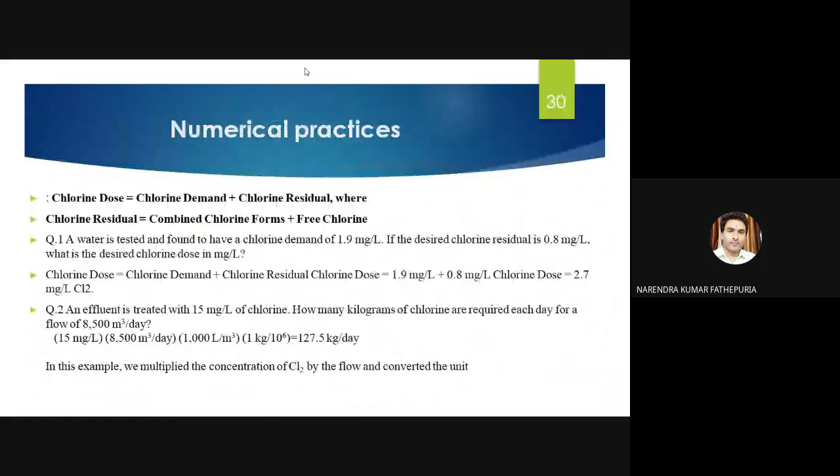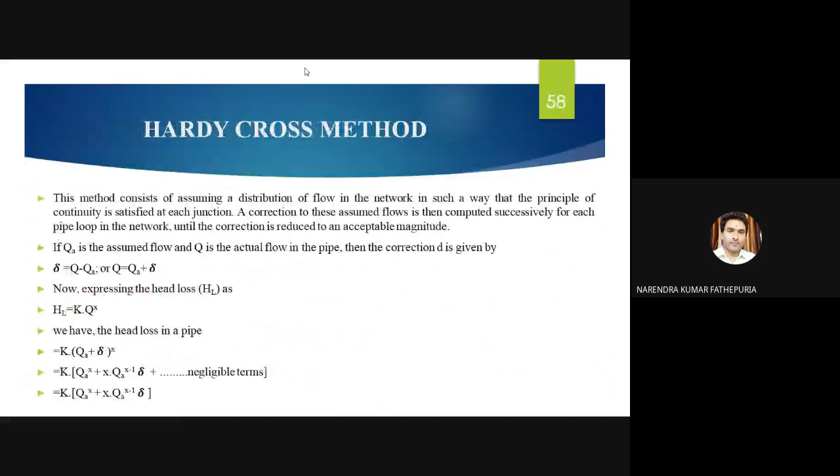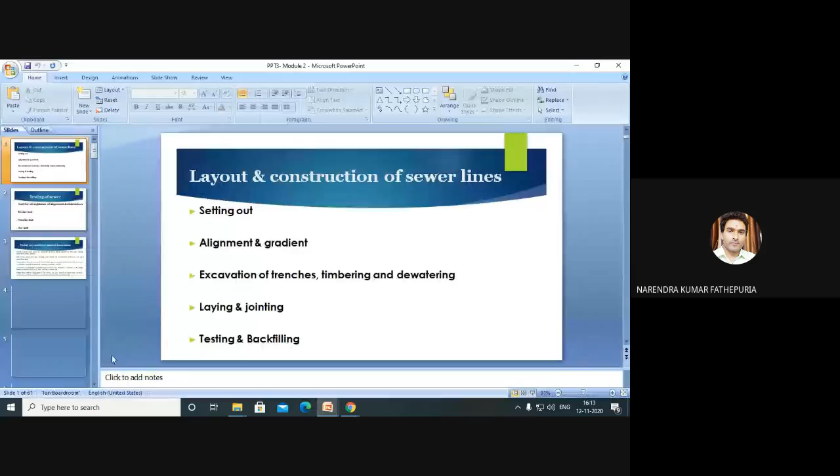The main part we want to discuss today is all about the factors involved. We'll talk about that later. We have studied about the sewer cleaning part and maintenance part - how to identify leakages and all that. We have also studied the wastewater characteristics. So now, natural purification.

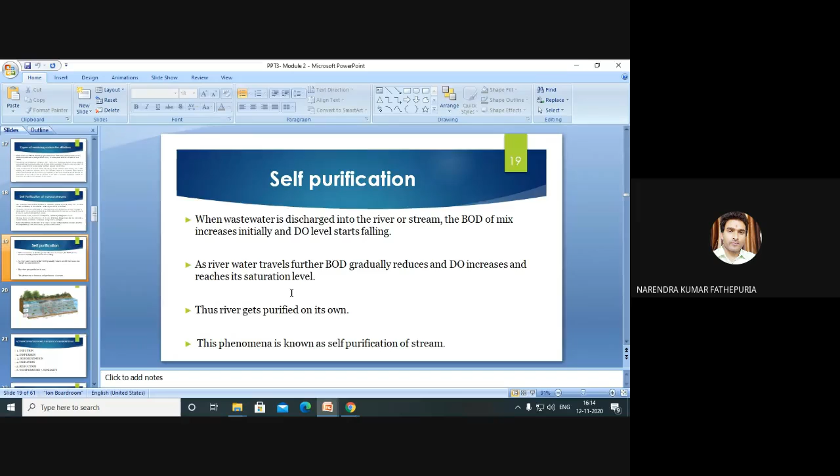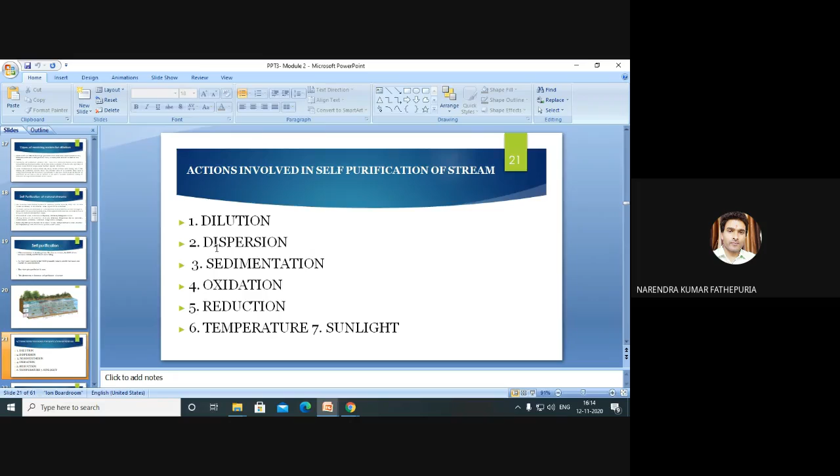I will go through this typically - as you know, these are the natural purification methods of wastewater disposal. Either you provide primary treatment and then discharge into the river, lake and freshwater body sources. Last time we discussed these factors till then: dilution, dispersion, sedimentation, oxidation, reduction, and temperature and sunlight, depending on how the dilution will take place.

So it's a natural process - if we have large flowing bodies, freshwater body surface sources like rivers and lakes, you can discharge the sewage water, maybe after providing partial treatment. Because of the natural process of purification, the oxidation reduction, since dissolved oxygen is present, it helps in various oxidation processes, and organic matter will finally decompose by natural methods. There are diffusion currents, and the water mixes thoroughly.

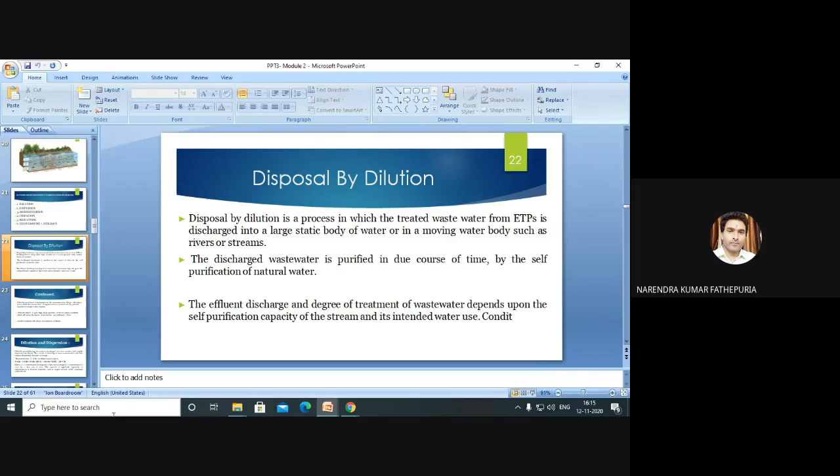The dissolved oxygen is mixing thoroughly, and the various phases of water will be treated naturally. So that was the equation for the concentration equalization that we have studied: Cs into Qs plus Cr into Qr.

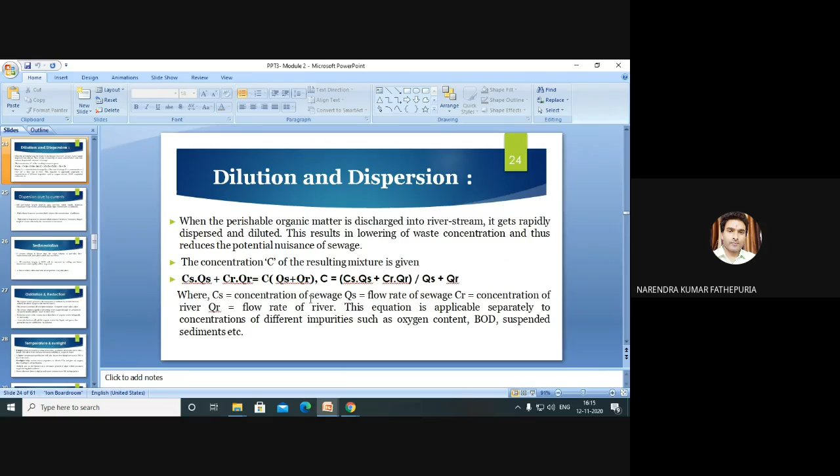Suppose we have a wastewater stream where the sewage water is discharged into the freshwater body river. You can take the concentration of the sewage and flow rate of the sewage, and Cr is the concentration of the river and Qr is the flow rate of the river. This conjured equation will be followed for getting the mix water concentration, if you want to find it out.

Dispersion due to currents, sedimentation - these are the following factors, 7 factors as I told you, depending factors. Oxidation, reduction - these are the processes that will take place in sequence. And temperature and sunlight play a very important role.

As I told you, at high temperature solubility will be low, and low dissolved oxygen will be there. Sunlight and temperature play a very important role for the aerobic decomposition of organic matter. Just as in the photosynthesis process of plants, sunlight and temperature play an important role. In the same way, microorganisms will absorb CO2 and give out oxygen. The self purification process will be faster.

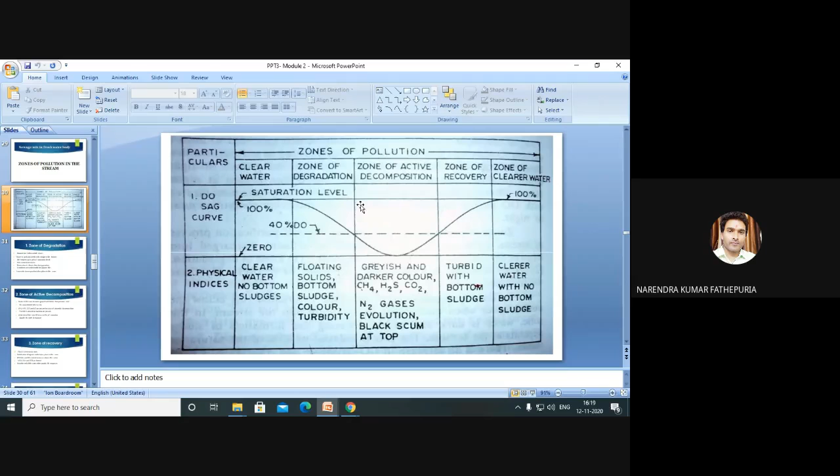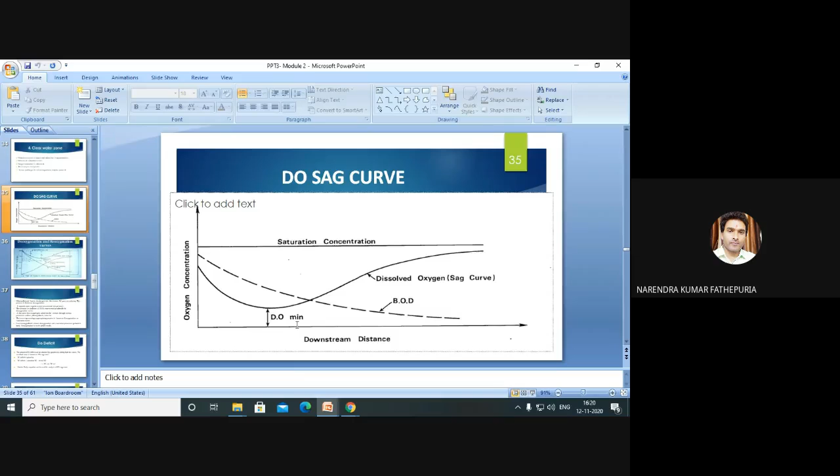So this is the saturated DO curve, the DO sag curve. In this clear water zone, finally the water will be treated naturally without doing anything. So this is the whole process I have explained, and that way step by step it will go. This is the saturated DO level, and this is the dissolved oxygen curve where all these points take place.

Now one thing is the deoxygenation rate as well as the reoxygenation rate. That is important while you are going for the Streeter-Phelps equation. The deoxygenation rate as well as the reoxygenation rate - you will require these. This is the whole process. Deoxygenation as well as both oxygenation and reoxygenation processes take place simultaneously.

So this is the same old curve, the DO sag curve. This is the critical point where the critical DO, the minimum component, the minimum DO will be present. And you see in this diagram, time of flow we have taken on the x-axis, and DO concentration we have taken in percentage on the y-axis.

Now if you see that, this is the zone of degradation where the dissolved oxygen starts getting consumed by the bacteria, and the percentage will decrease simultaneously. So the decrease happens in this zone. This zone is called the deoxygenation curve.

By exponential analysis, with a simple derivation, you can get the value of the deoxygenation curve, the deoxygenation rate. Now simultaneously, the reoxygenation curve will also be followed. Both processes take place simultaneously, because of reaeration, mixing, and the water flowing, currents are happening, and reaeration takes place.

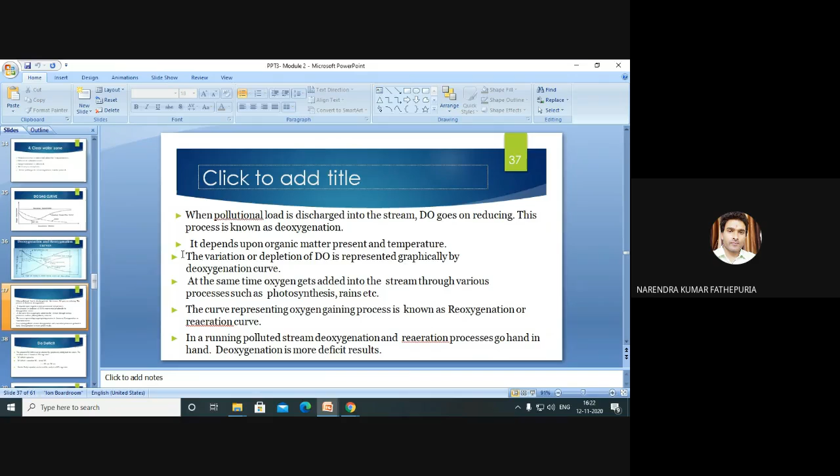So when pollution load is discharged into the stream, the DO keeps reducing. This process is known as deoxygenation. So we have to get the value of DO deficit. DO deficit is nothing but the saturated DO minus the actual DO, the difference between saturated DO and actual DO. So simply, DO saturated minus DO actual gives you the DO deficit.

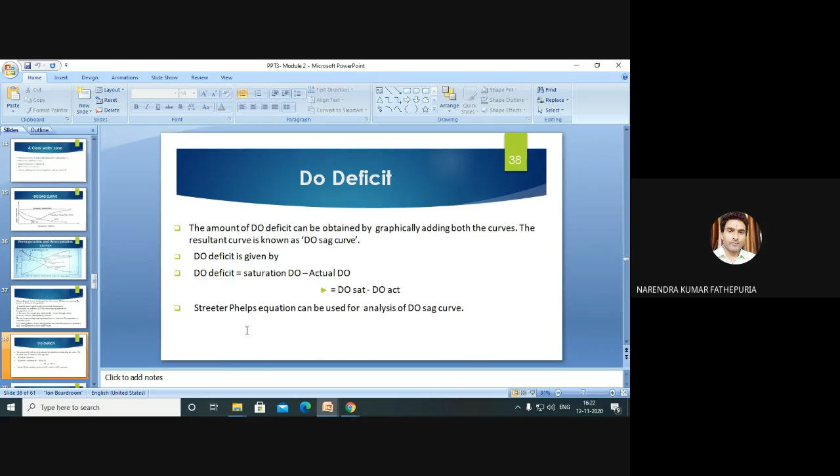The amount of DO deficit can be obtained by graphically adding both curves, and the resulting curve is known as the DO sag curve. Based on this, the Streeter-Phelps equation has been derived. It is the analysis of the DO sag curve. This is called the Streeter-Phelps equation.

So the rate of increase of DO deficit is equal to the rate of deoxygenation minus the rate of reaeration. As I told you, both processes take place simultaneously, so you have to balance the reaction. Similar to how in an energy reaction we write Q in equals Q out plus losses, the same way you have to balance this equation.

So the rate of increase of DO deficit is equal to the rate of deoxygenation minus the rate of reaeration. The mass balance equation written in words: accumulation equals in minus out plus the reactions and the difference. Because we are looking at the element by itself, there is no flow of water into or out of it.

So the mass balance on the oxygen becomes V into dC by dt equals O in minus O out plus the rate of oxygen removed by degradation per volume, plus the rate of oxygenation from the atmosphere. Here we have the rate of reaeration and the rate of deoxygenation.

Oxygen removed by biodegradation, you can write as D, subscript oxidation rate equals rate of decay. It will be exponential, as you can see in the graph, it is exponentially decreasing. So since it is decreasing, we write it as minus Kd into L.

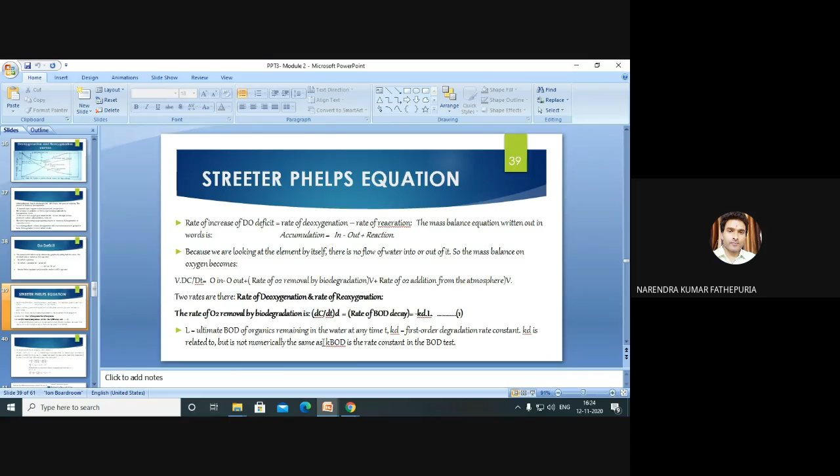L is the ultimate BOD of the organics remaining in the water at any time t. Kd is the first order degradation rate constant. Kd is related to, but not numerically the same as, the K BOD. That is not important for now. This derivation we have done in conventional classes also.

So dC by dt for the reoxygenation rate also follows the same approach. What is happening? The dissolved oxygen amount is increasing, so we take a plus sign. So Kr, subscript R representing reoxygenation, Kr multiplied with Cs minus C.

C is the dissolved oxygen concentration. Cs is the dissolved oxygen concentration at saturation level. This is predicted from Henry's law of gases. So Kr is similar to the rate constant, the reaeration rate constant, similar to the Henry gas constant. This value is related to the characteristics of the stream, and this is the basic differential equation that must be solved.

Both the rates you have to combine. So the basic equation will be: volume dC/dt is equal to the deoxygenation rate plus the reoxygenation rate. You will get the complete value. Then finally you will put the value of dC/dt, that is minus kd into L, that you have determined, and then here you got kr into (Cs minus C). So you go for the addition of both.

Mathematically, it is convenient to express everything in terms of the derivative of D. So what is DO deficit? Saturated DO minus actual DO, so Cs minus C. So Cs minus C you can represent by D, the DO deficit. So finally, you can solve in that manner.

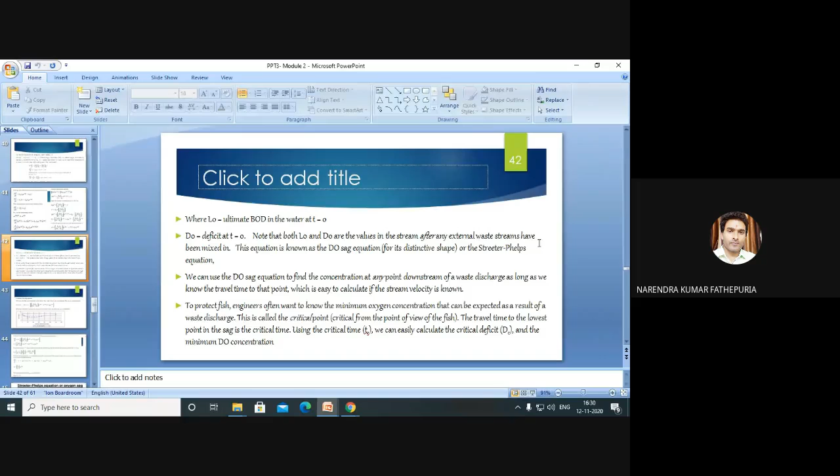So we use the DO sag equation to find the concentration at any point downstream of a waste discharge, as long as we know the travel time to that point, which is easy to calculate if the stream velocity is known. D naught is the deficit at t equal to 0, and L naught and D naught are the values in the stream after any external waste streams have been mixed in.

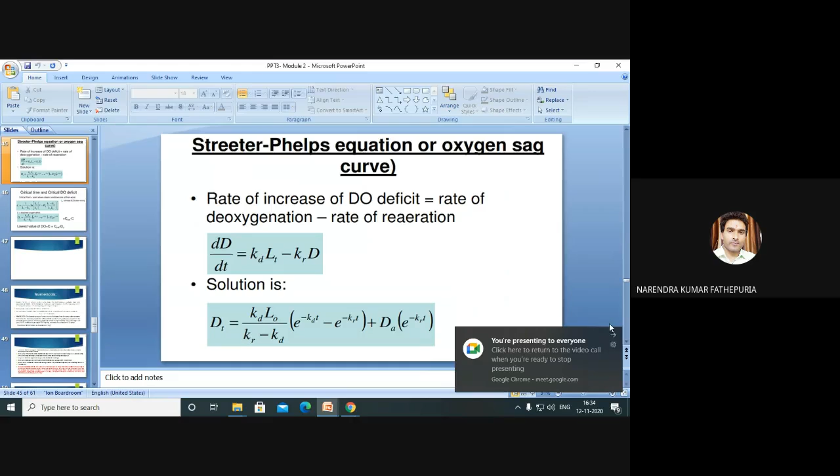Sir, unmute your mic, sir. Sir, we can't hear you, sir. So we can't hear you. Yeah, yeah. Now is it audible? Yeah. It is this one, sir. Yeah, where were we? Here. Okay. So here you see that. Yes, sir.

This is the standard equation for the Streeter-Phelps, the dissolved oxygen at a particular time. And this was the critical DO that we have derived just now, the critical point where the stream conditions are at their worst. L naught is put here; this is the standard we have put. Ultimate BOD after mixing. So these equations you have to remember while you are solving numericals.

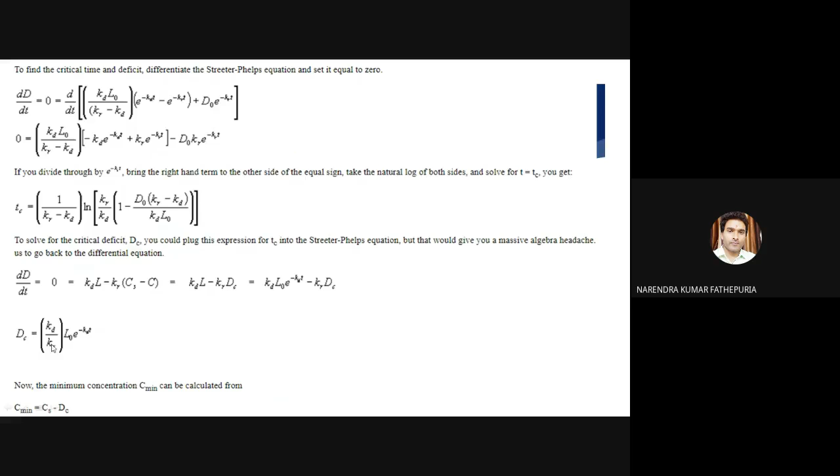Okay. So the lowest value of DO you can get as C saturated minus DC, as I told you. If you get this value DC, you will put it here. This is one equation for DC, and another is this equation that we have derived. Generally, they will focus on this equation. If the numerical is larger, then they will go for this one. So don't worry. KD and KR will be given in the exam. L naught will obviously be given.

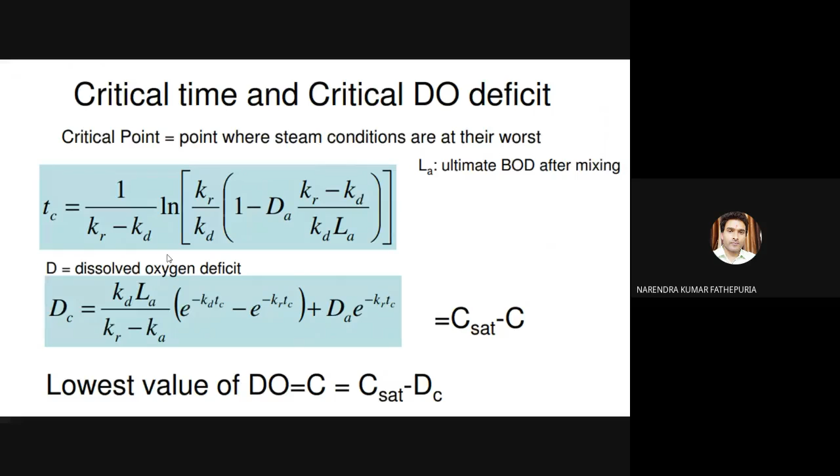And what is unknown here? DT you can get. In the same way, L naught will be given. This is the L naught; that's why we have put it. So all the things will be given. You can get both the values TC and DC. If you have a DC value, then the lowest value of DO also you can get. These are certain numericals on this that we have done.

The deoxygenation constant K varies with temperature. If temperature is given, then you have to use this formula: KT, T is a subscript here, not a multiplication, is equal to K20, also a subscript, multiplied by theta to the power T minus 20 degrees. So if the temperature is given in the question, you have to use this equation.

This is theta actually, not Q. The theta value may be taken as 1.056 for the range of 20 to 30 degrees Celsius, and as 1.135 for the range of 4 to 20 degrees Celsius. What is the time? Yeah, the self-purification constant, you will get the ratio of

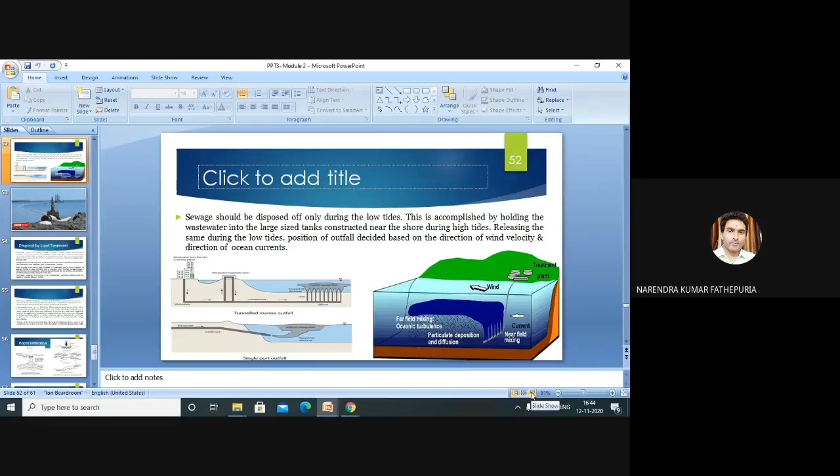Sir, you're not audible, sir.

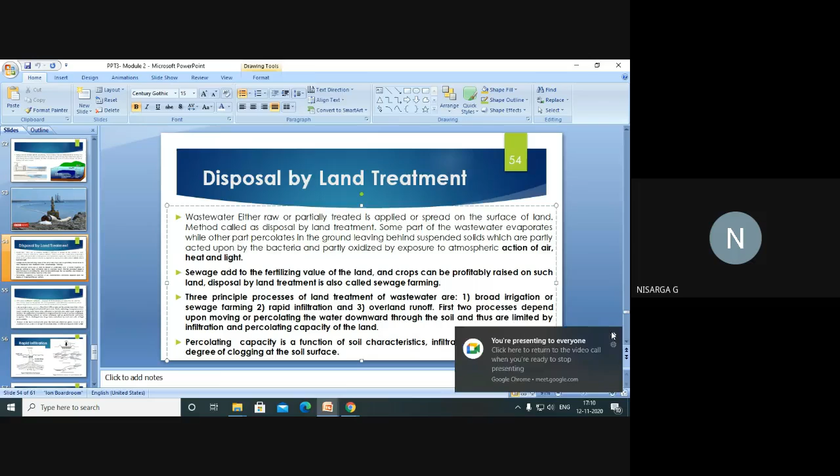Okay. So this is the disposal by land treatment, the last one. Either you have to treat the waste or partially treat the waste, and then you can send it to the surface land itself. It can be used for sewage farming or as a fertilizer. There are various advantages, and there are some conditions for disposing of this sewage.

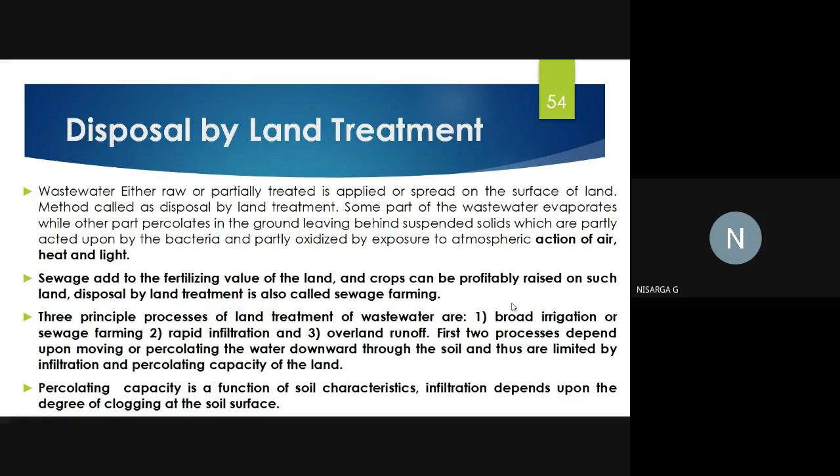The sewage should not be very toxic. It should not have any toxic chemicals with it. And there are some standard limits for sewage disposal into the land. So you have to go for the water quality analysis first and check the parameters. If the BOD, COD, pH level, total suspended solids, and even the inorganic metals all come under the limit, then you can dispose of it.

So land treatment. Some part of the wastewater evaporates while the other part percolates into the ground, leaving behind the suspended solids, which are partly acted upon by bacteria and partly oxidized by exposure to the atmosphere because of the action of air, heat, and light. So self-purification takes place once you put the wastewater in the open. With time, natural purification will take place, but it's a long process. Another thing is the bad smell and odor is also a problem. So it is not safe.

But if we are not able to treat the sewage to that extent, or we don't have a sewage treatment plant in a small town, then you can do it. But we should have open land without any disturbance, and you can use the sewage for sewage farming also. That is also a good thing. So there are three principles of land treatment of wastewater. One is broad irrigation or sewage farming. Second is rapid infiltration. Third one is overland runoff.

The first two processes depend upon percolating the water downwards into the soil, and thus is limited by the infiltration and percolating capacity of the land. So if wastewater doesn't have any significant impurities which are harmful, you can discharge it. Of course some water and some impurities will infiltrate and percolate. If it is not too harmful, then you can discharge it. So we have to check the infiltration capacity and percolation capacity of the land or soil also.

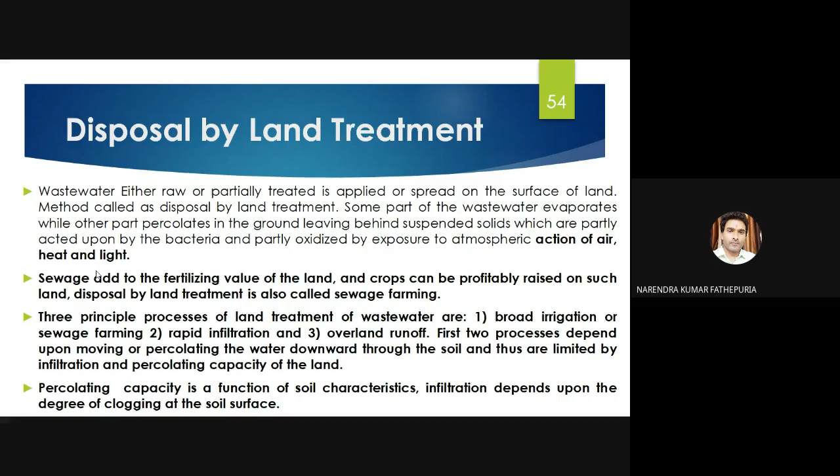Percolating capacity is a function of the soil characteristics. Infiltration depends upon the degree of clogging at the soil surface, that we have to check. Then there are slow rate systems. It's the predominant form of land treatment for municipal and industrial wastewater, as the technology incorporates wastewater reuse, crop utilization of nutrients, and wastewater disposal. And we have various methods for irrigation, like sprinkler, subsurface, furrow, and drip irrigation. So you can use it for irrigating your crops, like sewage farming.

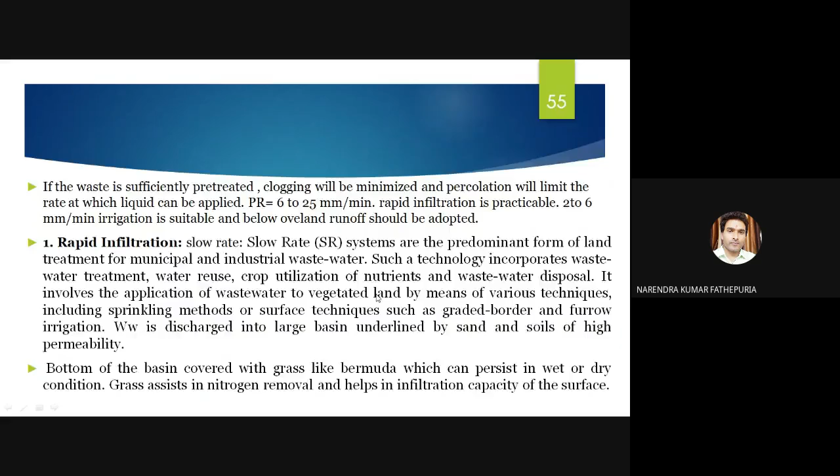The process by which purification of the sewage takes place in the first two methods is mechanical straining and filtration of the organic matter present in the sewage. Complex compounds in the sewage are thus converted into harmless mineral salts, which serve as valuable fertilizers.

So two uses: you can use this wastewater for irrigation, as well as getting natural fertilizer. This is sewage farming. It is a very good concept, but if excess nutrients are available, nitrogen, phosphorus, and potassium, then it creates a problem. So partial treatment is required, primary and secondary treatment is required, then you can discharge it without any harm. So it's a very good concept for organic farming.

This wastewater can be used for irrigation purposes without polluting the soil. Good quality sanitary measures, open water courses, there are some constraints that you have to maintain. A hygienic environment you have to maintain in the surroundings. Contamination of the crop raised on the sewage farm, you have to check it. And the soil quality should not degrade with respect to time.

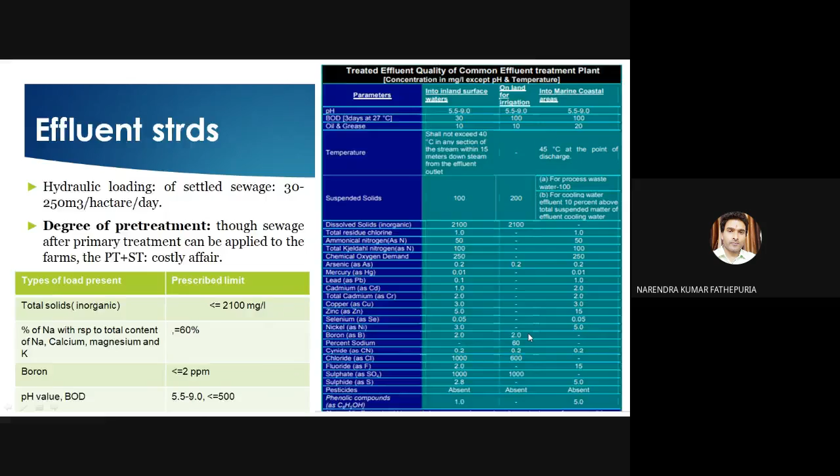These are the effluent standards that you have to maintain for the various physical, chemical, and biological characteristics you have to check, into inland surface waters, on land for irrigation, and into marine coastal areas. These are the standards that we have to follow before discharging the wastewater into the land.

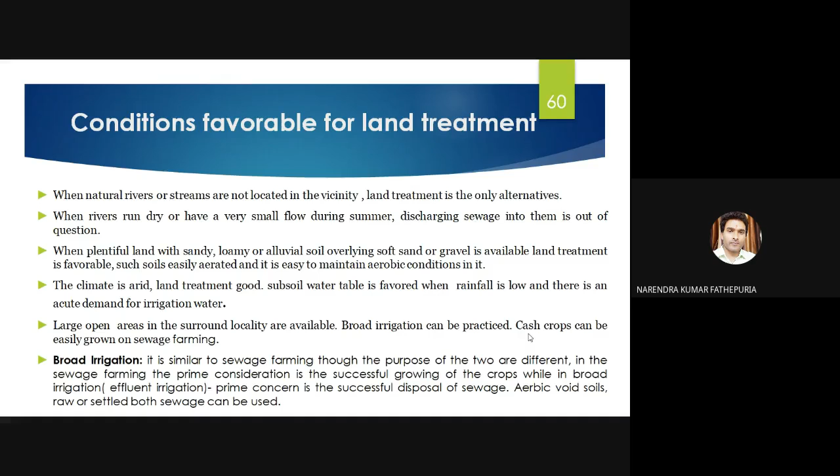This is sewage sickness. With the continuous application of sewage on the land, the pores of the soil get clogged, preventing oxidation and causing a noxious smell. The land is unable to take any further load of sewage. This phenomenon is called soil sewage sickness. So you have to take care of that.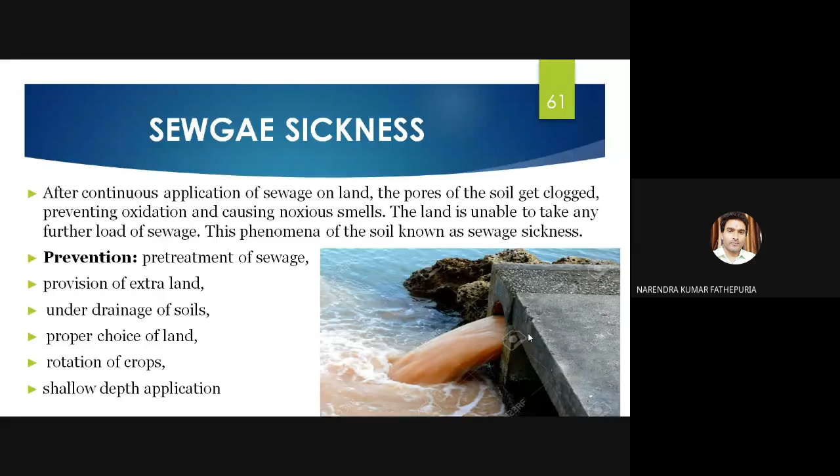For prevention, pre-treatment of the sewage is required if you want to protect your land from sewage sickness. Provision of extra land, under-drainage of the soil, proper choice of land, and rotation of crops also help in this, so the fertility can be maintained. Shallow depth application also. Okay. That is all about the land treatment methods of sewage disposal.

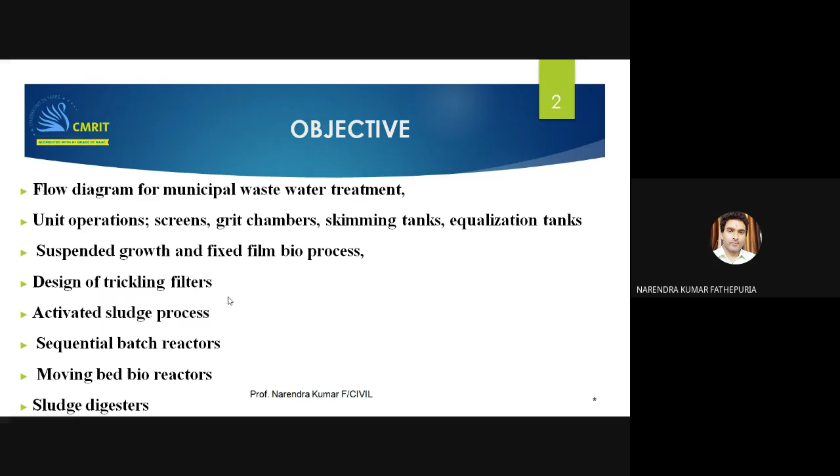Raw sewage water is coming. It will be passing through the screening process, like coarse screens and fine screens. Then water will pass through the grit chamber, where all the clay, sand, glass, metals, glass fragments, and all those things will be separated out. It will be automatically cleaned by various mechanical machineries, and the screening is required for removing the debris and physical impurities, leaves, and all that.

So it can be removed. So after the grit chamber, you can send the water to the skimming tank, the oil and grease skimming tank, where the oily and greasy components of wastewater can be removed. Because the sewage water has a lot of oil and greasy components, which create a problem for the further treatment processes, we have to remove it.

After that, water will be sent to the primary clarifier, the primary sedimentation tank, sometimes called a primary settling tank, where physical sedimentation as well as chemical precipitation will be taking place. There are two processes here: plain sedimentation and sedimentation followed by coagulation. If you are adding coagulation, the process will be faster. There are various hydraulic parameters you have to check here, like detention time, surface loading rate, surface overflow rate, and horizontal velocity of flow.

There are various types of sedimentation tank: horizontal flow and vertical flow type. We have circular type and rectangular type sedimentation tanks. These are the various designs that we will study. The reason for providing a primary sedimentation tank is to remove the suspended solids present in the water and all the undissolved impurities. Mainly the suspended solids will be removed. Some percentage of TDS, total dissolved solids, will also be removed here in the primary clarifier.

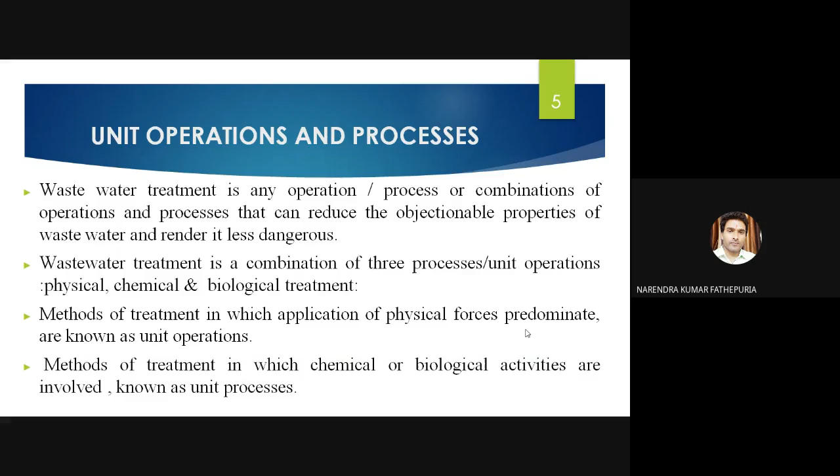Wastewater treatment is a combination of three processes: unit operation, physical, chemical, and biological treatment. Sometimes a combination of physical, chemical, and physico-biological treatment is also followed. The method involving application of physical force is called physical unit operations, while methods involving chemical or biological activities are known as chemical or biological unit processes.

The unit operations approach in water and wastewater treatment has the following advantages: it gives better understanding of the process and capability of these processes in attaining the objective.

We want clear water. We want the water to be free from objectionable substances, so it should not harm the air, soil, and water. We want clear water which can be easily disposed of into river water bodies with safe disposal methods. We don't want any toxic component in it.

This helps in developing mathematical and physical models of the treatment mechanism and consequent design of treatment plants. Once you understand the water quality of a particular sewage water, it will be easy to design what unit operations are required and what is not required. So in both ways it will help.

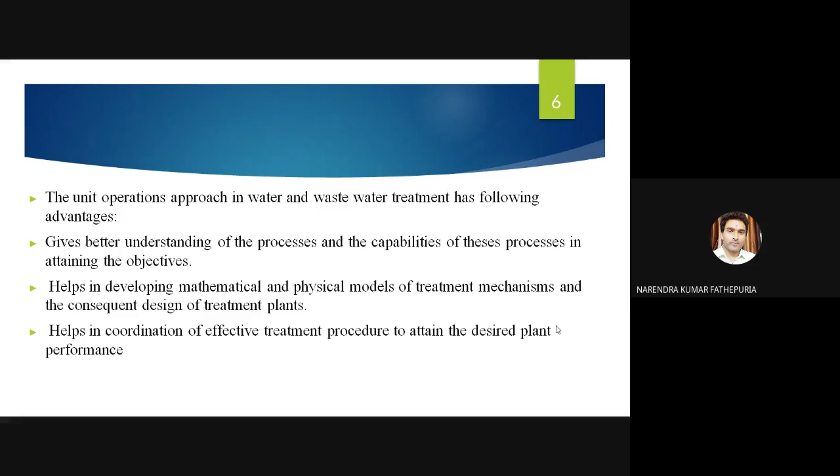So these are the physical unit operations: screening, comminution, flow equalization, mixing, flocculation, sedimentation, flotation, filtration, and micro screening. Each has various objectives.

Screening is required for removing coarse and settleable solids by surface straining. Flow equalization is required to equalize the flow and mass balancing.

Your pH level you have to equalize, and concentration you have to equalize. Sometimes water is coming from various streams, so the concentration can be different, and the pH level can also be different. It will be easy to treat the further sewage load while going for biological treatment if the concentration is equalized.

Mixing is required; a lot of agitators and flow mixing is required. Sometimes you have to add coagulant, so mixing is required, and you have to provide a flash mixing chamber for it, for mixing of chemicals and gases with the wastewater and maintaining solids in suspension.

Like in the suspension growth process, if I'm talking about the activated sludge process, the bacteria will be in suspension form, where you need to agitate the wastewater continuously so the bacteria can remain in suspension. So agitators and these mixing devices are required.

In sedimentation, removing of settleable solids and thickening of sludge is required. Flotation is for removing finely divided suspended solids.

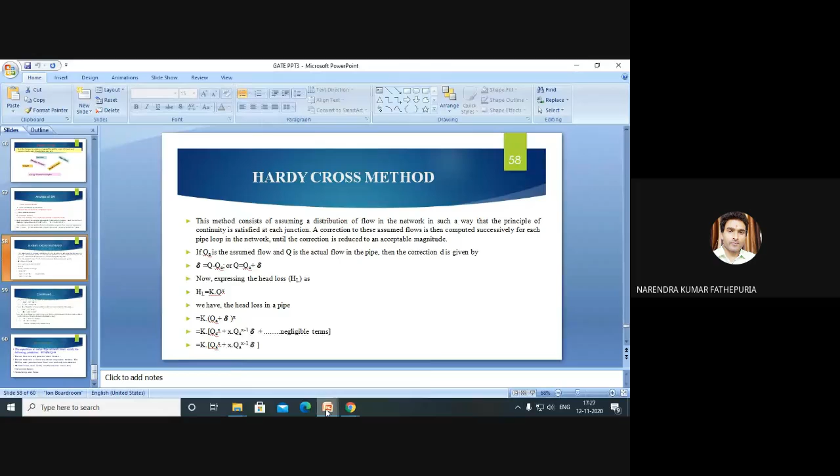So these are the unit operations. Filtration is required for removing finely suspended solids, fine residual suspended solids which cannot be removed by the sedimentation tank. It also helps in biological treatment and somewhat in chemical treatment.

It helps to reduce bacterial growth also, and it helps in organic matter decomposition somewhat, through filtration. In the sewage treatment plant, we generally use trickling filters and biological contactors.

In most cases, trickling filters are used. These biological filters help to reduce the biological load in the sewage water. It's an aerobic decomposition process.

We use sprayers; you can see the blowers and aerators for it. There are some micro screening processes also, used for removing algae from the stabilization pond.

These are chemical unit processes. Chemical precipitation is required to remove phosphorus and enhancement of suspended solids removal in primary sedimentation, gas transfer, addition and removal of gases, adsorption process, surface adsorption, and diffusion processes.

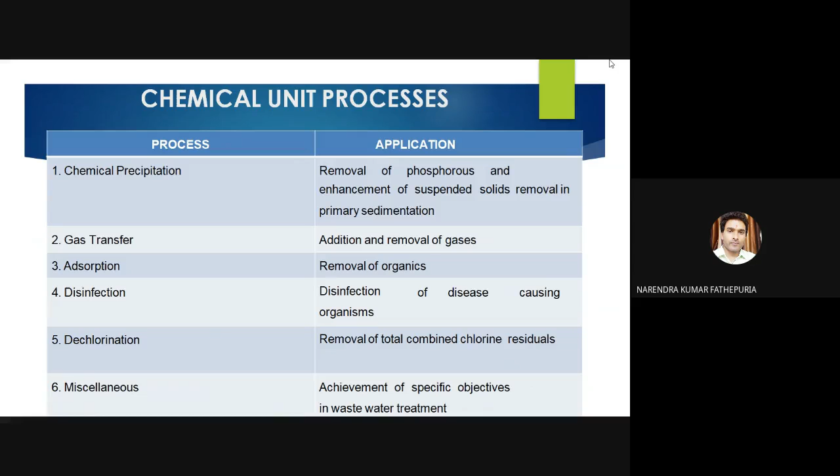Disinfection is required, generally chlorination and ozonation we have to follow. Dechlorination is also a chemical process, an excess chlorine removal process. If chlorine is dissolved in excess amount, you have to remove it, that is called dechlorination. If it crosses the threshold, it is superchlorination, and superchlorination is always followed with dechlorination. These are the biological unit operations.

Biological unit operations are those in which the removal of contaminants are brought about by using biological activities. In biological treatment of wastewater, the objectives are to coagulate and remove the non-settling colloidal solids and to stabilize the organic matter.

The wastewater is generally from three sources: domestic wastewater, agricultural wastewater, as well as industrial wastewater. For domestic wastewater, the objective is to remove various nutrients, especially nitrogen and phosphorus, which are otherwise capable of stimulating growth of aquatic plants, and to remove bacteria also.

The biological processes are classified by the oxygen dependency of the primary microorganisms responsible for treating wastewater. There are two types of processes here: aerobic process and anaerobic process. We have discussed these things in the regular classes if you have attended.

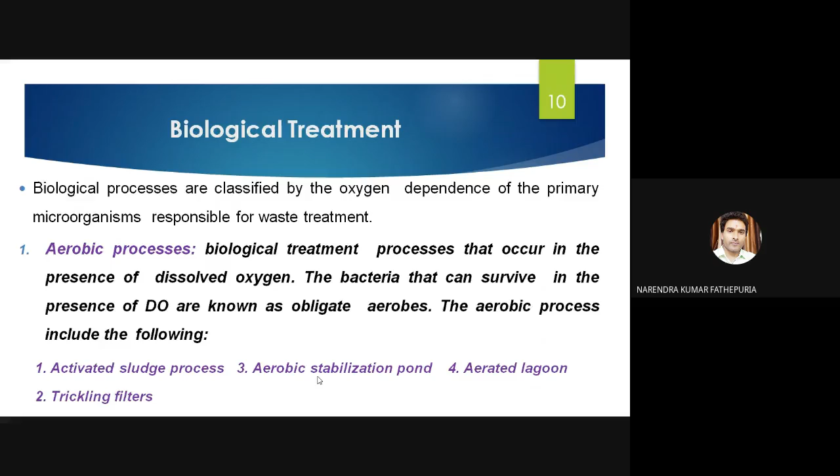In the aerobic process, biological treatment occurs in the presence of dissolved oxygen; bacteria that can survive in the presence of dissolved oxygen are known as obligate aerobes, or aerobic bacteria. The aerobic process includes the activated sludge process, aerobic stabilization pond, aerated lagoons, and trickling filter. All are aerobic processes. Another one is the anaerobic process.

Anaerobic waste treatment involves the decomposition of organic matter and/or inorganic matter in the absence of molecular oxygen. The anaerobic process consists of the following: anaerobic sludge digestion, anaerobic contact processes, anaerobic filters, and anaerobic lagoons and ponds. The third process is the aerobic-anaerobic process, a combination of both.

These are processes in which stabilization of waste is brought about by a combination of aerobic, anaerobic, and facultative bacteria. We'll move to secondary treatment typically.

As I told you, it is required to remove the soluble and colloidal organic matters present in our water in secondary treatment. In the case of domestic wastewater, the objective of biological treatment is to finally stabilize the organic matter; we want the organic matter to be completely stabilized and to be chemically and biologically inactive. Removing nutrients like nitrogen and phosphorus is also a main objective of secondary treatment.

The secondary treatment process may be further classified into three terms: one is the attached film growth process, another is the suspended growth process, and the third is the combined growth process. This is very important. The trickling filters come under the attached growth process, attached film growth process. The activated sludge process comes under the suspended growth process, a suspended culture growth process, where the bacteria will be in suspension form, or the bacteria will attach with the biomass.

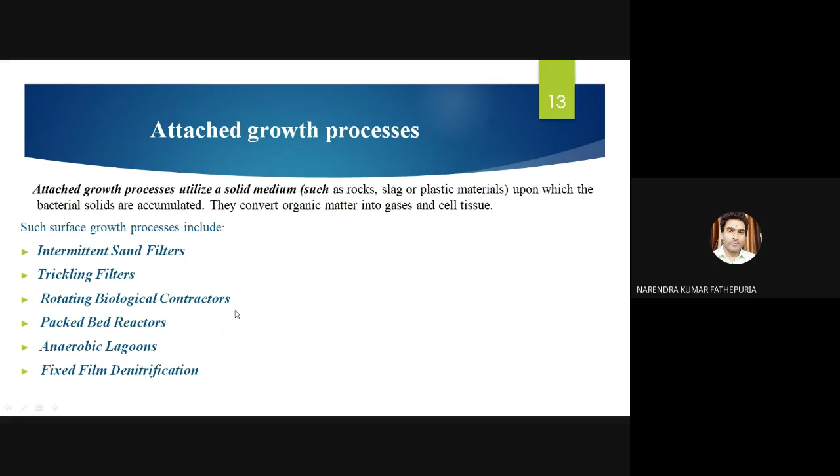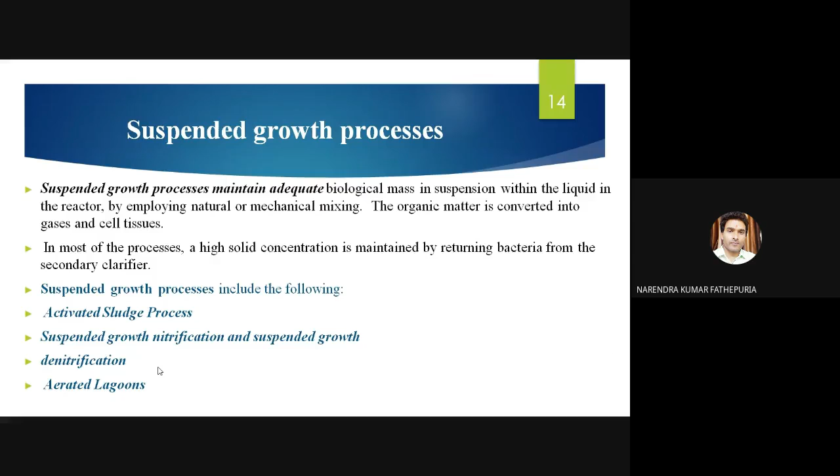So these are the processes for the suspended growth process, the suspended culture growth process. One is the combination, which is also mostly preferred sometimes. The combined process consists of both the surface growth process as well as the suspended growth process, so the combination sequence is important here.

One option is a trickling filter combined with activated sludge, where first the trickling filter unit is provided, then the activated sludge unit. Sometimes activated sludge comes first, then the trickling filter second. There are also facultative lagoons, where both aerobic and anaerobic bacteria can survive under both conditions.

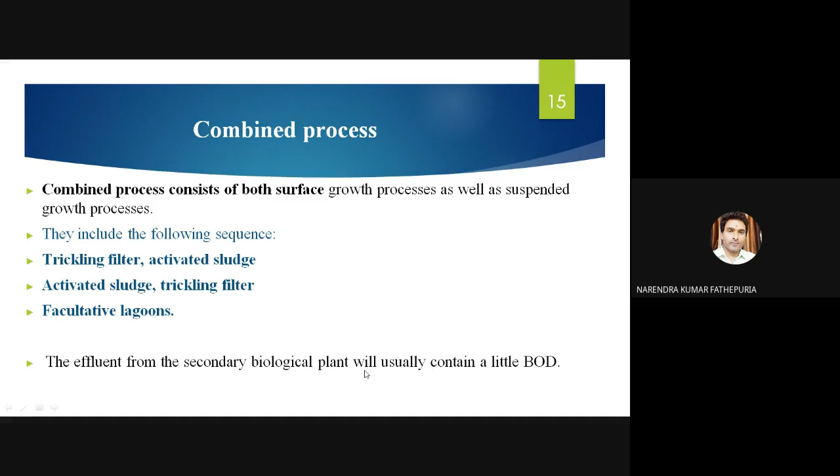The effluent from secondary biological plants will usually still contain a little BOD, and you have to provide various degrees of treatment. The degree of treatment is decided based on the biological, chemical, and physical characteristics of the wastewater, which you have to test first.

So degree of treatment: generally the pre-treatment, the preliminary treatment, is called 0 degree treatment. Then primary is called first degree treatment, and secondary treatment is called second degree or 2 degree treatment. Like this, degree of treatment has to be decided. And if you are going for the tertiary and advanced treatment method, then 3 degree treatment you have to provide. So this is called degree of treatment.

What are the objectives? The objective is clear. We have to remove the suspended solids and floatable materials, treatable or biodegradable organic matter, eliminate pathogenic organisms, bacteria and microbes from the water, and remove nitrogen, phosphorus and toxic organic components. For that only, we are going to provide a degree of treatment.

Now, what are the conventional treatment methods? We have a primary treatment process and a secondary biological treatment process. These are the conventional treatment methods that we have just studied in a conventional sewage treatment plant. Some advanced wastewater treatment processes and tertiary treatment methods are required, especially if industrial wastewater is included.

If the wastewater characteristics come with very high organic values, like TOC is very high, BOD is very high, and if industrial wastewater is also included, then tertiary treatment is incorporated if required. If it is normal domestic sewage, tertiary treatment is not advisable. So the chemical clarification, recarbonation, filtration: if the hardness is very high, then recarbonation is required.

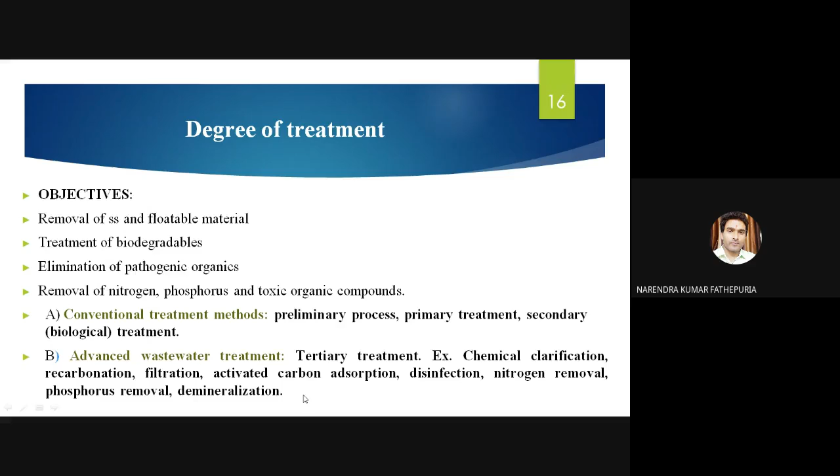Filtration, microfiltration, nanofiltration, activated carbon adsorption, disinfection processes like UV and ozonation if required. Nitrogen removal techniques, phosphorus removal techniques, and demineralization all come under the advanced wastewater treatment processes, like a demineralization tank required when the water has a highly alkaline nature.

Start from the preliminary treatment. Preliminary treatment, as I told you, has screening, grit chambers, comminutors, as well as floating units in a skimming tank. Every unit has its sequence as well as its objective. Screens are required for removing floating matter and debris. Grit chambers are required for removing grit, sand, clay and soil. Comminutors are required for grinding and chopping large suspended solids. All the visible particles will be removed in preliminary treatment.

And the skimming tank is required for removing oily and greasy components and fatty acids from the water, because most of the water will come from the kitchen, and fatty acids, liquids and oil components will come from there. From oil garages and automobile garages, water will have a lot of thick, oily and greasy components. From dairy product industries, a lot of oil and greasy components will also come out. And from soap also a lot of oil and grease.

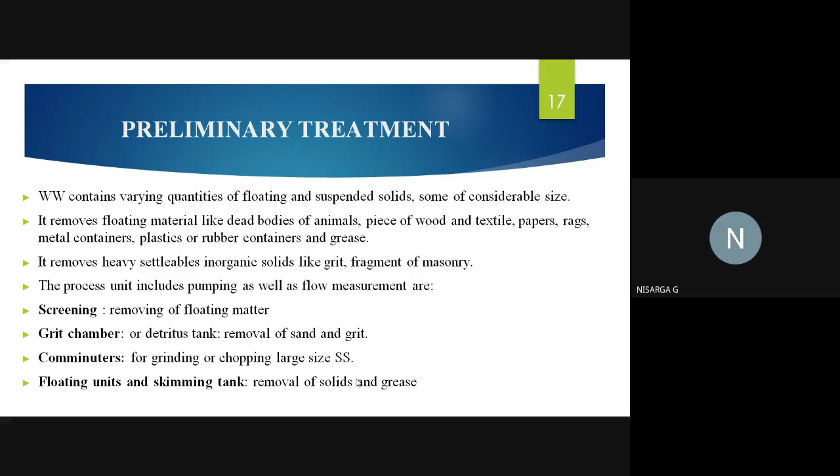Sir? Yes? Sir, can we stop here? We have a project review at 6. At 6 p.m.? Exactly. You can leave the class, okay? No problem. We both are in the same group, sir. Next class I need 1 hour. Tomorrow I'll take the classes. Tomorrow what time? Take from 3 to 4, sir, people are free then. We have class till 12:30. All right, you can leave the class. Thank you, sir.

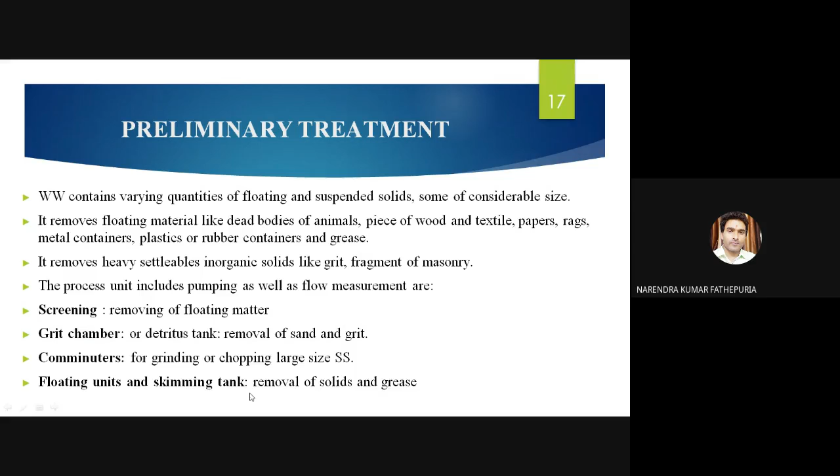It's the preliminary treatment process. Every unit has the following advantages. The floating units, skimming, removal of solids and grease. We'll start from the racks and screens, physical unit operations.

First, the sewage water comes from the outfall sewer. It starts from the lateral to branch sewers to the trunk sewer and then outfall sewers, which are interconnected in the sewer network. Once the water comes from the outfall sewer directly to the screens of the respective sewage treatment plant, it has to pass through the various racks and screens. These are physical unit operations.

So uniform size openings, generally parallel bars, rods and gratings, wire mesh or perforated plates we have to provide, generally circular or rectangular in shape. The usual procedure is to pass the influent water through racks or coarse screens. Bar screens are used to protect pumps, pipelines, valves and other appurtenances from damage and clogging by rags and large objects.

Bar racks having clear openings greater than 40 mm should be mechanically cleaned with grit removal facilities. The bars run vertically or at a slope varying from 30 degrees to 80 degrees with the horizontal, and are hand cleaned or mechanically cleaned racks. Cleaning devices are rakes which periodically sweep the entire screens, removing solids for further disposal.

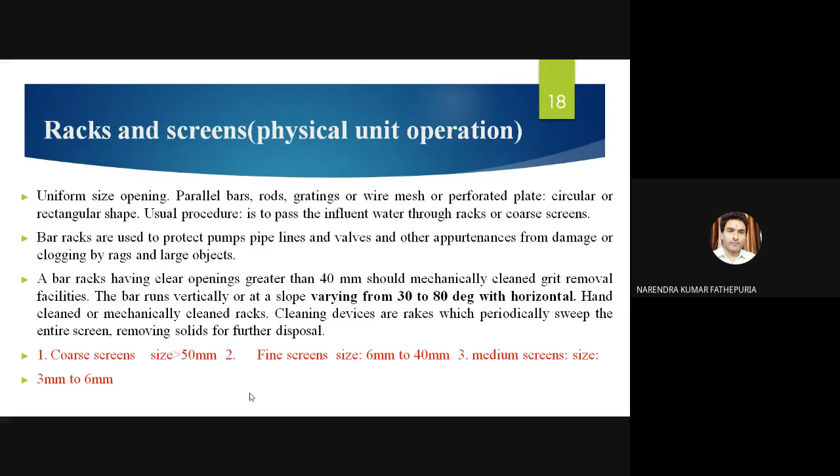The types of screens are coarse screens, fine screens, as well as medium screens. Coarse screen size should be greater than 50 mm, fine screen size should be 6 mm to 40 mm, and medium screen size should be 3 mm to 6 mm. So these are the screens. They are inclined at the treatment plant with an inclination angle between 30 degrees and 80 degrees. In most cases, 45-degree inclination.

This is where the mechanical cleaning is happening. This is an AC induction motor connected to mechanical devices which keep rotating up and down, and it keeps sweeping away all the impurities which are locked in these bar openings. So see here, all the debris, leaves, plastics, containers, aluminum containers, and everything will be locked here. There's a uniform size distribution.

The gradient size: first you have to place the coarse screen, then you have to place the fine screens. Larger particles will be locked here, removed by the mechanical cleaning devices, and sent to the respective dumping yard. There is also solid waste management treatment for it, for compaction and volume reduction techniques, right?

And there is the solid waste management collection part where they will manage everything, reduce the volume, thicken it, or cut it into chips, with grinding and cutting operations. And finally, they will take this waste to the landfill or maybe for the solid waste management agreement. Okay. Now we'll study the design of the screens.

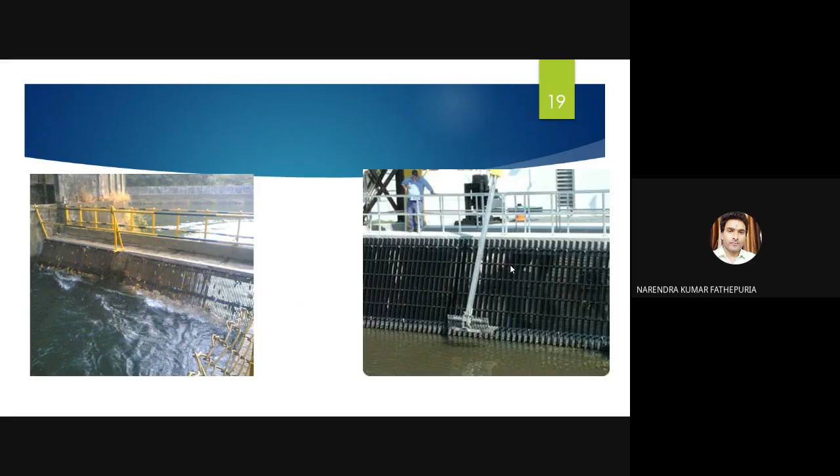Okay, so n is the number of openings, S is the size of openings. Like this, you will get the value. The bar diameter generally you can take as 10 mm, and S is equal to 25 mm normally. So this is the sequence in which you can design the screens.

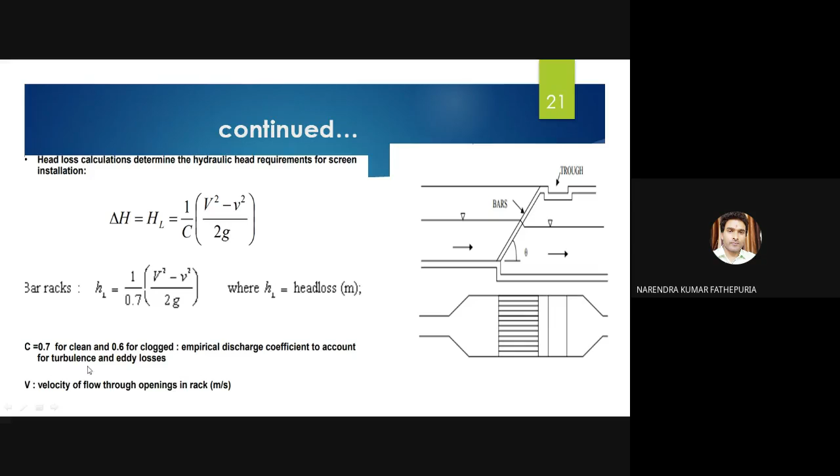So this is the head loss equation. Same equation, you can put it as 0.7. It depends: if it is clean bars, then you take 0.7. If it is clogged, then you take 0.6. It is the empirical discharge coefficient to account for turbulent and eddy losses, and v is the velocity through the openings in meter per second.

These are some numericals on screens. Find the number of bars. Diameter of each bar is given. Discharge flow rate is given, 25 MLD. Size of opening is 25 mm. Approaching velocity 1 meter per second. If it is not given, you have to consider 0.6 to 1.2 meter per second range. Head is given 0.9 meter. Find head loss if the angle of inclination theta is given 60 degree. So simple, apply the formulas.

First, you convert the MLD into meter cube per second. So 25 into 10 to the power 6, million to liter. Then liter to meter cube, divided by 10 to the 3. And 24 into 60 into 60, written as 86400. Finally, you will get this flow rate as 0.289 meter cube per second. Now, width into depth of flow gives the area, Q divided by V, that standard equation we derived here. So Q is 0.289 divided by 1, then you will get the area in meter square.

Now H is also given here, 0.9 meter. So you put it as H, then you will get the width as 0.3215 meter. Now what is the formula for width? Width is equal to n into S plus n plus 1 into diameter. S you already know, diameter you already know, n is unknown, then you will get the number of bars. So if we solve it, you have to take unit conversion here. Width is 0.3215 meter.

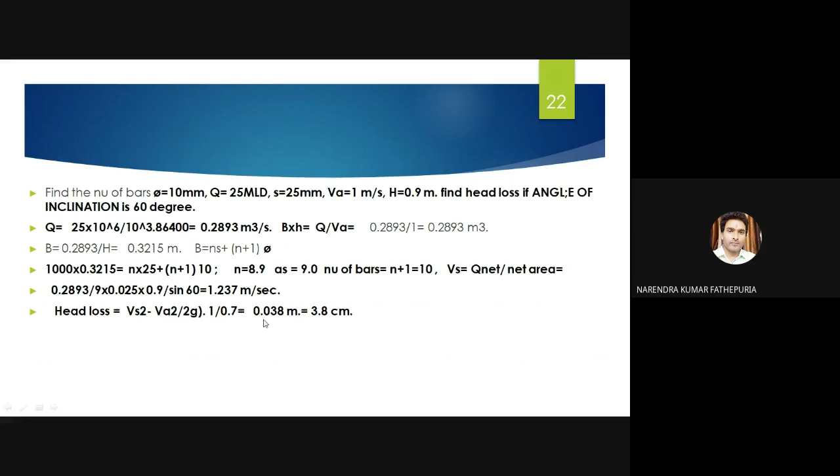If head loss you want to consider, then Vs square minus V square divided by 2g into 1 upon 0.7. Then you put all the parameters, you will get all the values. Like this, simple numericals will be here. The next is grit chamber. The water which will come from the screens will be sent to the grit chamber.

The grit chamber is aimed to remove grit from the wastewater flow. If grit is not removed, it increases wear and tear of the pumps used at a treatment plant. Grit also settles down fast and occupies space. The grit chambers are used for the following purposes. Number first, to remove the inorganic grits.

The inorganic grit size should be greater than 0.2 mm. Specific gravity should be greater than or equal to 2.65. Sand, silt, clay, cinder, broken glass pieces, metal fragments can be removed. These are all coming in inorganic fragments.

Then the organic substances like non-biodegradable grits, size should be greater than 2 mm. Specific gravity should be 1.05 to 1.1. The coffee grounds, tea, eggshells, bone chips, grains, seeds, etc. will be coming in the organic substances. So both types of grit particles can be removed.

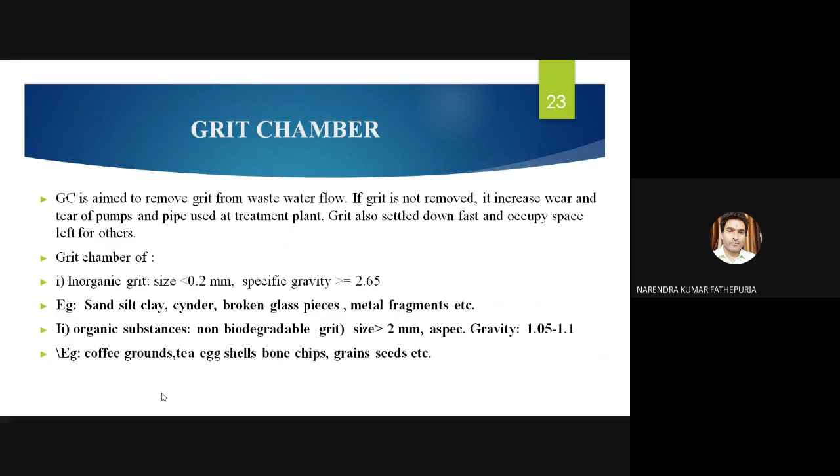So grit chamber generally is a narrow, long rectangular channel with increased cross-sectional dimensions. They decelerate the flow velocity and allow grit to settle down. You have to provide retention period for it. So generally 45 seconds to 90 seconds you can provide a retention time for it. So 1 to 3 minutes maximum.

The grit chamber is a settling tank with the provision to control flow velocity. A velocity control device known as a proportional flow weir is provided to the outlet of the grit chamber to maintain the constant flow velocity irrespective of the flow rate. So as I told you, while the water is coming from the screens, of course the flow velocity will be higher.

So you have to reduce the flow velocity because you need a laminar flow. Slow down the velocity, constant flow rate you want. That's why you are using flow weirs and all that to slow down the velocity. A 25% increase in the flow velocity leads to scouring of the settled grit. Similarly, 25% decrease in flow velocity leads to settling of other particles.

A flow velocity of 0.3 meter per second is provided, which neither allows scouring nor settling of other than grit. So flow velocity generally you have to consider for the horizontal flow 0.3 meter per second. Range you have to consider 0.25 meter per second to 0.4 meter per second. Retention time generally 1 to 3 minutes. The volume of grit chamber, how you will get it? Q multiplied with retention time.

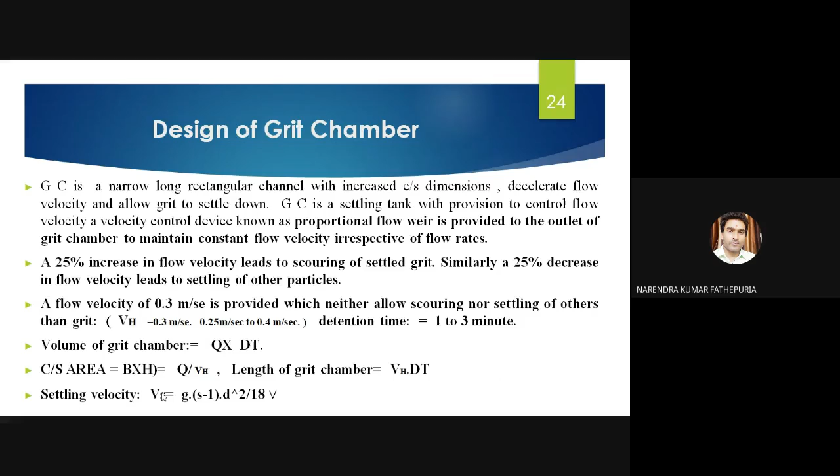The control velocity of flow through the grit chamber, as I told you, proportional flow weir, you have to attach a Sutro weir, Parshall flume, Palmer-Bowlus flumes are also sometimes used. So the grit particles lie in between 0.1 mm to 1 mm size. The zone of settling corresponding to this range of particles is called the transition zone. The relationship between the settling velocity, size, density of particles, density and temperature of the liquid is given by the

Hazen's modified equation. If temperature is also incorporated, then Vs = 60.6 (S - 1) D (3T + 70)/100. All usual notations: T is the temperature in degrees Celsius, S is the specific gravity, rho S divided by rho W. Vs is the settling velocity, you should get it in centimeter per second.

And then the standard length should be 7.5 to 20 meters, width should be 2.5 to 7 meters, and depth should be 2 meters to 5 meters. So these are the conditions for the settling velocity for the grit chamber. If temperature is given, this equation you have to use exclusively. If temperature is not given, then this top equation.

Same thing we have studied in discrete particle settling. Type 1, type 2, type 3 settling. So discrete settling and the other settling like this. Same thing we will be studying here. Okay.

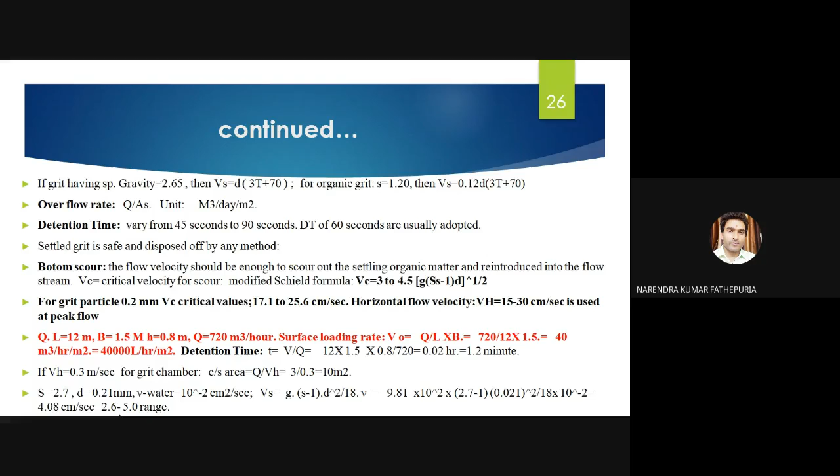So Vs, the settling velocity, you can use Stokes' equation. What is the answer? You will get 4.08 centimeter per second. Always you will get settling velocity in centimeter per second, you have to convert it. The range should be 2.6 to 5 centimeter per second.

After the grit chamber, water has to be sent to the skimming tank for removing oil and grease components, as I told you. The skimming tank operations are like this, I'll come to it later.

It is aimed to remove the oily and greasy granular component from the wastewater. Oil remaining affects secondary treatment and also causes problems to the disposal system, that's why it has to be removed. Specific gravity of oil and grease is less than the specific gravity of wastewater, therefore they cannot settle; oil and grease are removed by flotation. The flotation is carried out by applying compressed air from the bottom so that oil and grease rise and float to the top of the skimming tank. From there, oil and grease is skimmed off.

Now for the design of the skimming tank, we need to find out the surface area, that is length into width. The formula is 0.00622 Q divided by VR. These are all empirical formulas, not direct design parameters, so we have to check it. VR is the liquid rise velocity, the standard value you have to take is 0.25 meter per minute.

Overflow rate, actually flow rate, will be in meter cube per day, based on how much capacity of water you are going to treat and send into the skimming tank. So flow rate will be decided already, 5 MLD, 2 MLD, 3 MLD, whatever, in meter cube per day. If needed, you have to convert it to meter cube per second. Detention time you have to provide is 3 to 5 minutes for this operation.

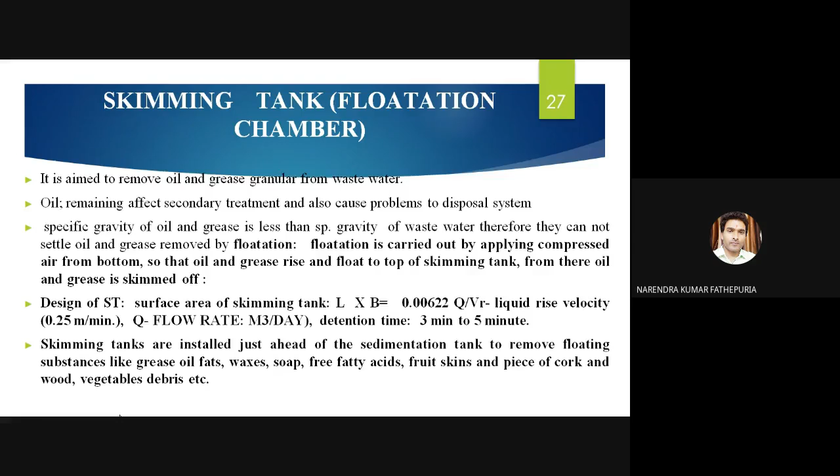Source of pollutants: oil and grease substances enter the sewers from the kitchens of restaurants and houses, motor garages, oil refineries, soap and candle factories, etc.

The skimming tank is a chamber so arranged that floating matter rises up and remains on the surface of the wastewater until removed, while the liquid flows out continuously.

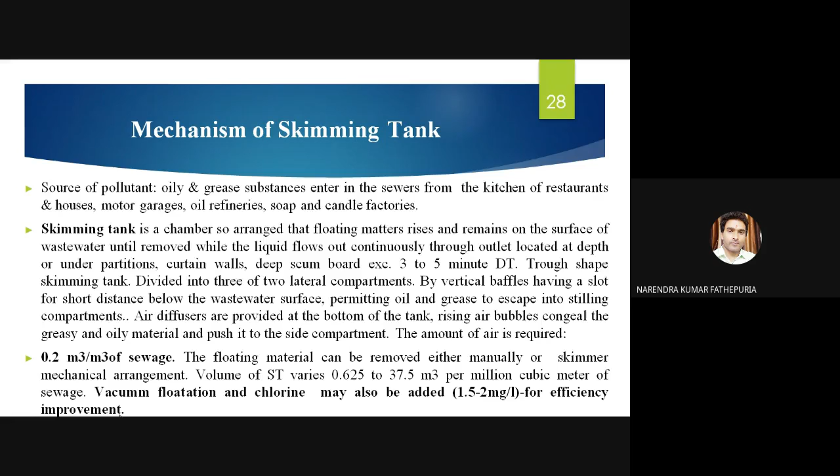A dose of 1.5 to 2 mg per liter is sufficient to improve the efficiency of the skimming tank. Vacuum flotation is also a very good technique to increase the removal efficiency of the skimming tank.

You see here, this is the skimming tank. This is the clear water at the bottom, and this is the emulsion and oil portion on top, because there is a difference between the specific gravity of oil and water.

The gravity is lesser than fresh water. So this sewage water, which is coming out from the grit chamber, has a lot of oil and grease components.

This mechanical arrangement is operated by pneumatic valve operation, where pneumatic pressure is applied. It is movable in to-and-fro directions, with a cylinder piston mechanism generating pneumatic pressure.

This is the skimmer, a rectangular skimmer. It will take away all the impurities with it and send them to the tank where they will be stored.

Then fresh water goes out through the underwater drainage system. These are the skimmers moving in the to-and-fro direction, floating across the surface.

This is the probe stopper, which will come till there, and then a high probe is required, so they have put in this mechanical arrangement.

If there are vegetable piles and other wooden scraps, they can be removed using this floater, this skimmer.

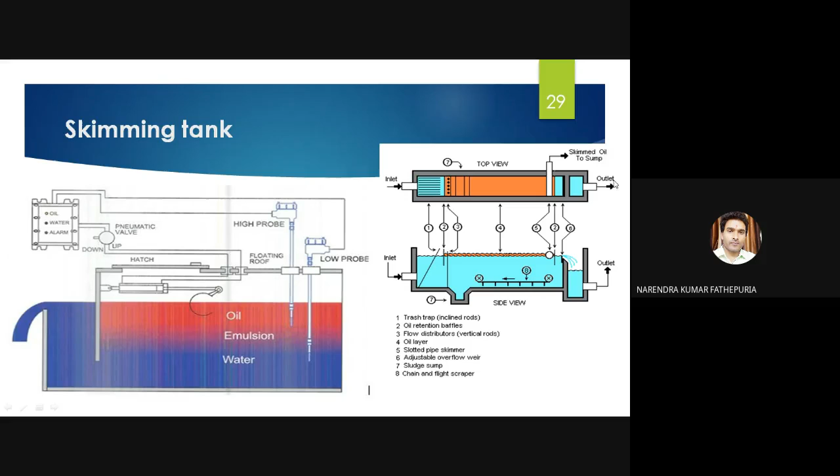Next is the primary clarifier.

The primary clarifier is the next unit. After the skimming tank, water is sent either to an equalization tank or generally directly to the primary sedimentation tank, the primary clarifier.

We have various types of sedimentation tanks: horizontal flow, vertical flow type, circular type, and rectangular type. In my previous series of lectures, I have gone through in detail about the sedimentation tank design.

I covered the process of coagulation and flocculation, meaning sedimentation as well as sedimentation followed by coagulation, and we have done complete tank design along with some numericals. So I'm not going into detail on the primary sedimentation tank here.

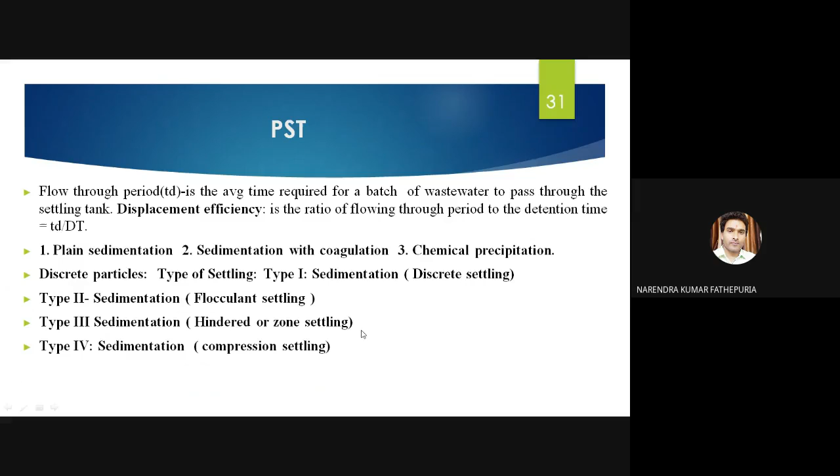So there are types of settling. Type 1 settling is called sedimentation, or discrete settling, where the discrete particle does not change in size and shape while settling. Type 2 settling is called flocculent settling. Type 3 settling is called hindered or zone settling. Type 4 is sedimentation or compression settling.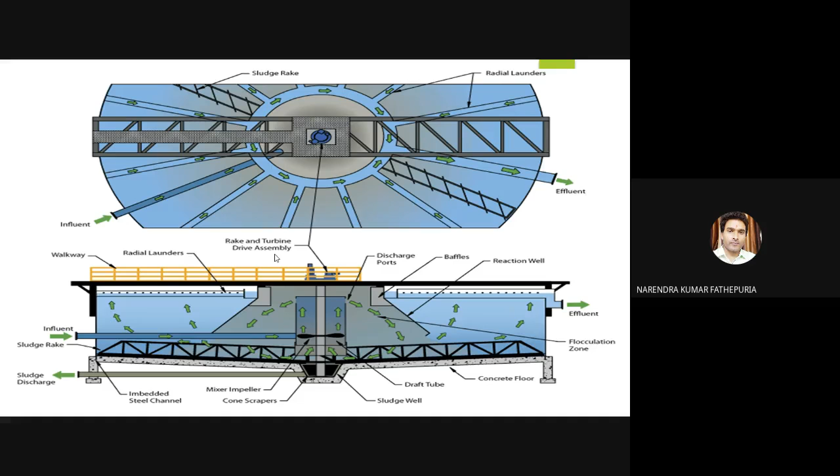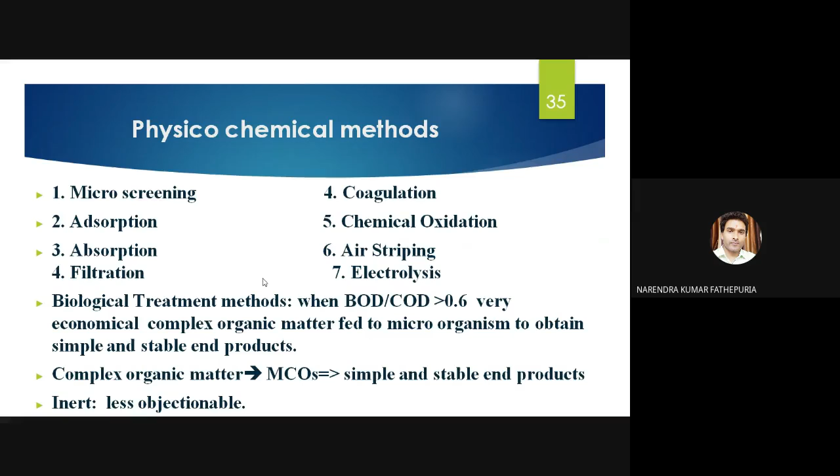Now we move to the secondary treatment process — the physicochemical process, and then the mechanism of microbial growth versus time graph, how the biological processes take place. All those things we'll talk about later once we have time for it.

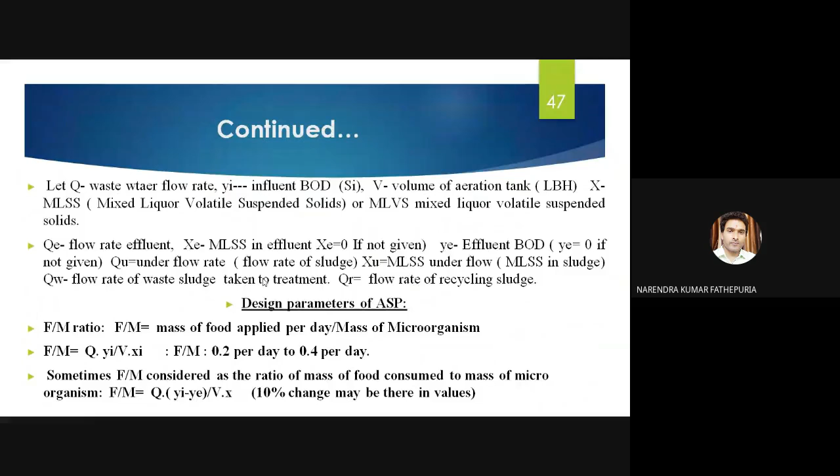Then the activated sludge process — how the process takes place, what are the ratios, what numerical portions we have to cover, design parameters for activated sludge process. Then there are modifications to the activated sludge process, and sewage filtration like trickling filters.